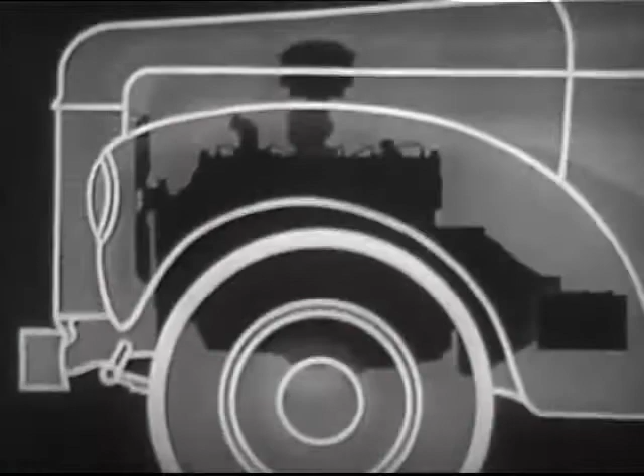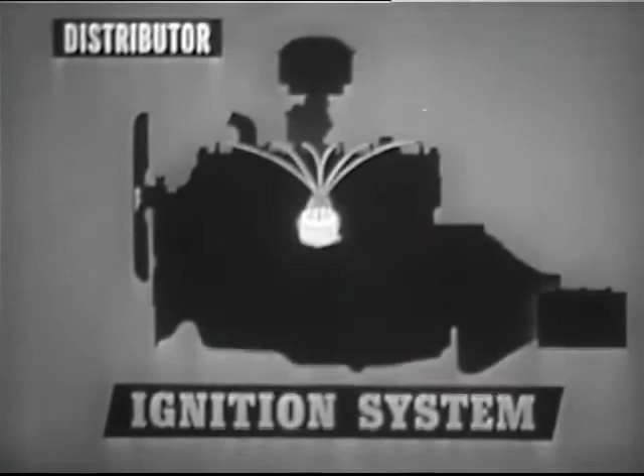Regular preventive inspection of the electrical system will help ensure its efficient and continuous operation. The source of electrical energy, the battery, must be maintained in proper condition to operate the starting motor, as well as the lighting system and electrical accessories, and the ignition system. Included in the ignition system are the coil, the distributor,

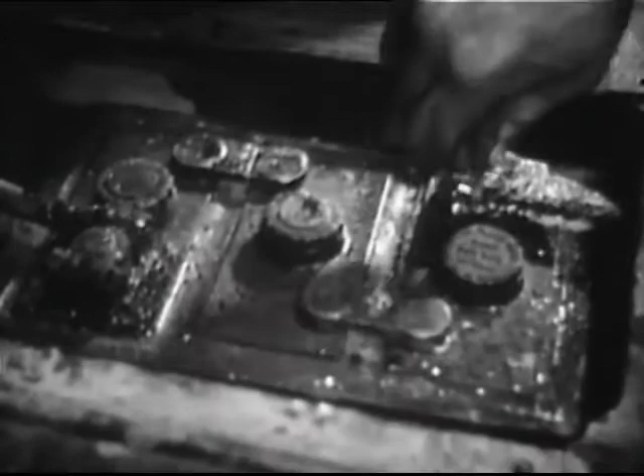and spark plugs. The generator, with its output controlled by a voltage regulator, must keep the battery charged. Since the entire system depends on the battery, begin by checking each cell with a high-resistance sensitive voltmeter. Fully charged cells should register approximately 2.2 volts.

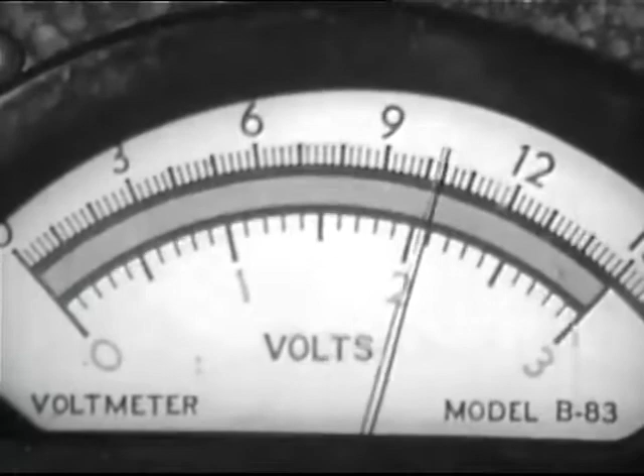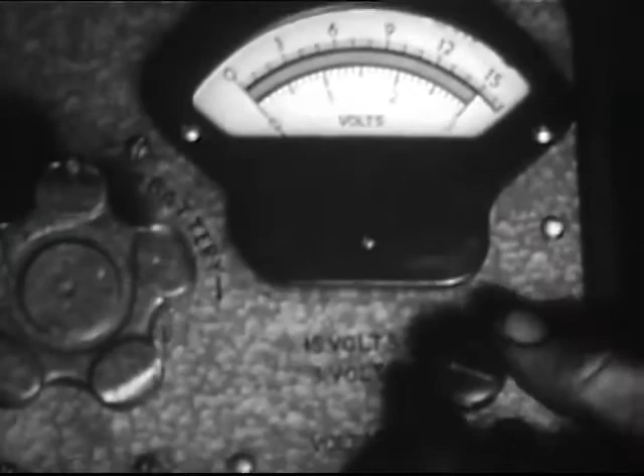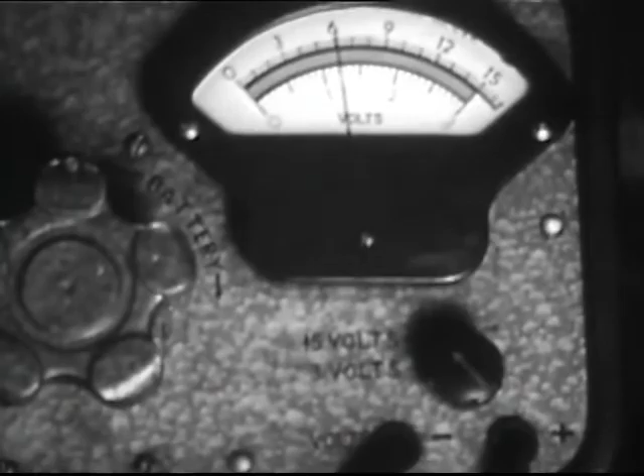Cells should not vary by more than 0.15 of a volt. Check the overall battery voltage. A 3-cell battery, fully charged, should test approximately 6.5 volts. Record the voltage readings on the inspection report.

Next, test the specific gravity of the electrolyte in each cell. Use a hydrometer equipped with thermometer and temperature correction scale. Fully charged cells should show a specific gravity of 1250 to 1280. Make allowance for battery temperature using the hydrometer correction scale. If the reading is low, 1220 for example, the cell is being undercharged about 50%. Record the hydrometer readings on the report.

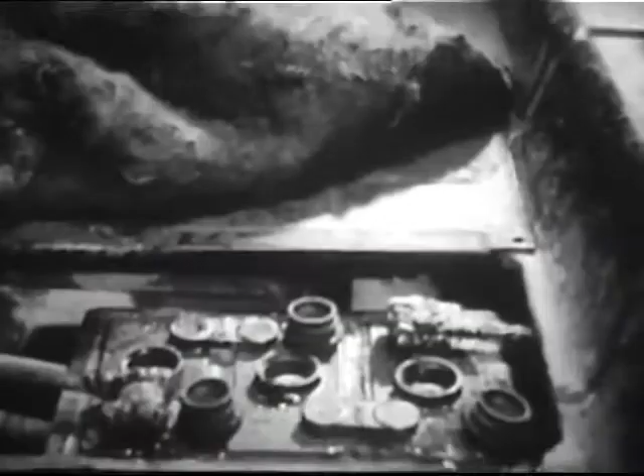Check the liquid level of each cell and add distilled water if necessary. To avoid overfilling, use a self-leveling syringe. Rest the tip on top of the plates and force the water in. Any excess is automatically drawn back into the syringe.

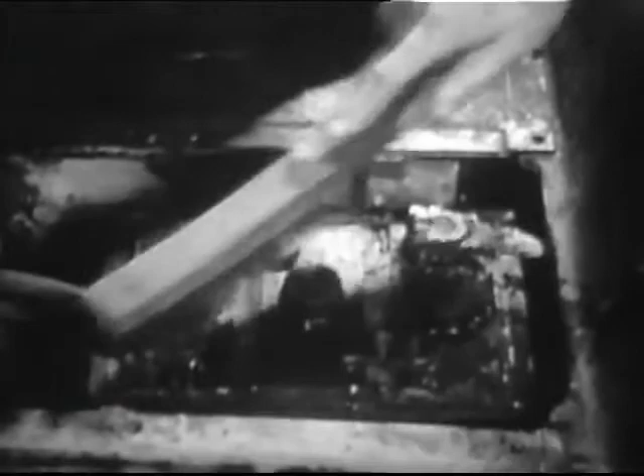Check cables and terminals for tightness. Remove corrosion with a stiff brush. Wash the battery with a weak solution of soda and apply anti-corrosion compound to the terminals.

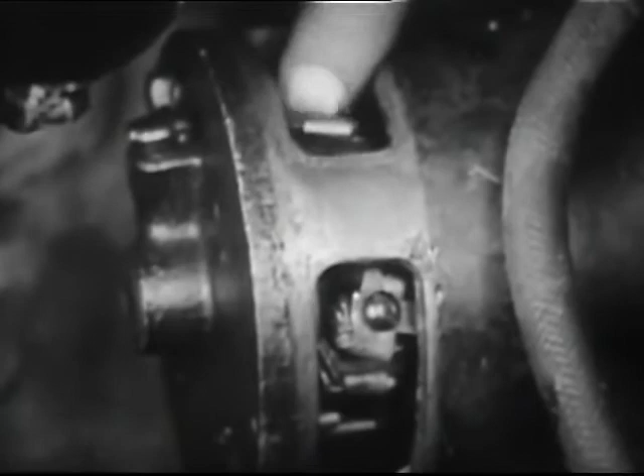To inspect the starting motor, first remove the cover band. Check the length of the brushes. Those worn to less than half their original length should be replaced.

Examine the commutator for high mica, flat spots, or pits. When using the screwdriver, be extremely careful to insert the blade only at the metal risers. Do not touch the commutator or the wiring.

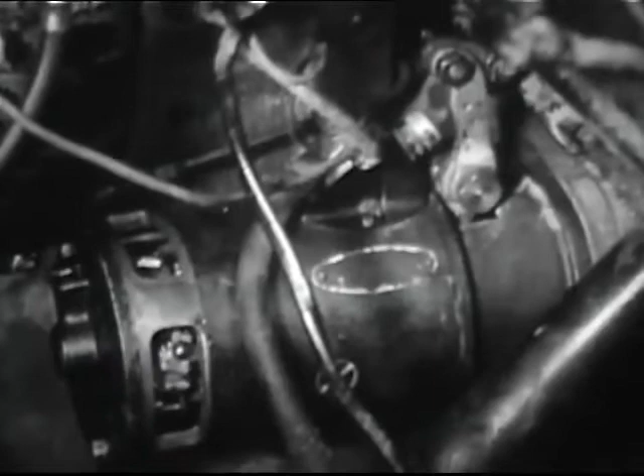If the commutator is dirty, switch on the starter and clean it with a piece of double-aught sandpaper wrapped around a stick. Never use emery cloth.

Check bushings of the starter housing for radial play. These show no appreciable play.

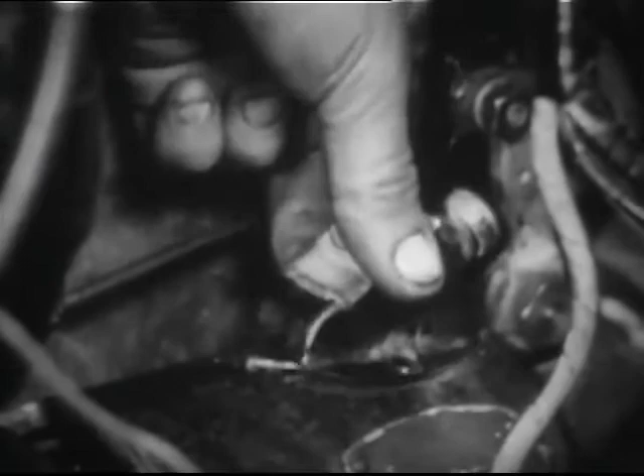Before testing the starting switch, disconnect the ground strap from the battery to prevent short circuit. Remove the switch and carefully inspect the terminals. Switches with damaged terminals should be replaced. See that all connections are tight.

Note the condition of the starting motor and switch on the report form.

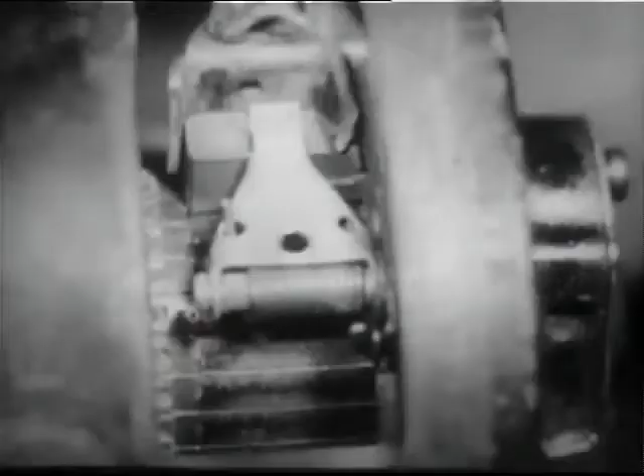Inspection of the generator is generally similar to that of the starting motor. Check the brushes. This one, less than half its original length, should be replaced. To replace brushes, the generator should be removed and work done at the bench. To properly seat new brushes, hold a seating stone against the turning commutator. Particles of stone are spread beneath the brushes, seating them very quickly.

Inspect the commutator for flat spots. If it has thrown solder, the armature is overheating and must be repaired or replaced. Otherwise, clean the commutator with double-aught sandpaper. Never use emery cloth. Springs with improper tension cause excess wear and should be replaced.

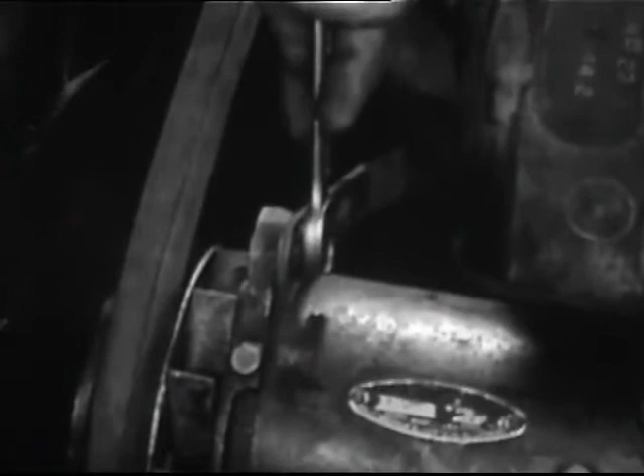Now, unhook the fan belt from the generator pulley and check the armature shaft for play or roughness. As a further test, run the engine and check for unusual vibration which might indicate roughness in the armature shaft bearings.

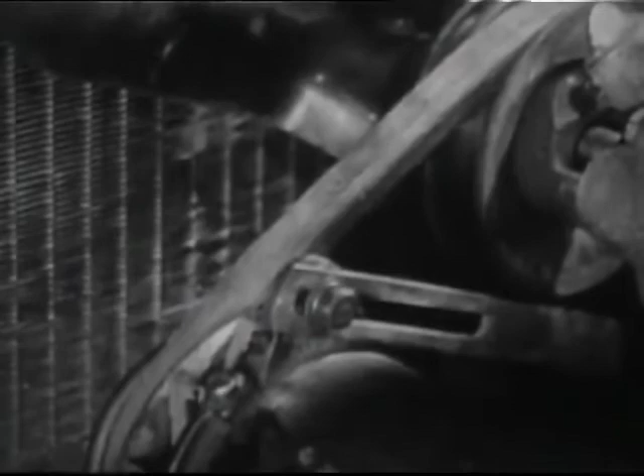Check the fan belt for wear and for proper tension. About 1/2 inch of deflection is correct. Be sure mounting bolts are tight. Check tightness of the terminals.

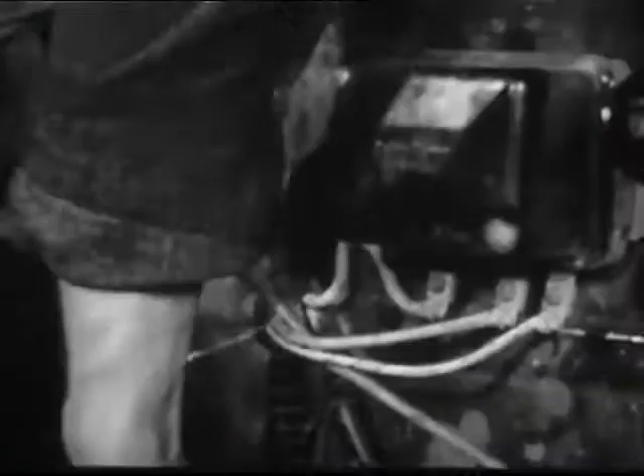Now make a quick check of low-tension wiring around the engine, particularly between generator and voltage regulator. Look carefully for worn insulation, loose or broken wires, and loose connections. Check the spots where wires may chafe against metal parts.

Check the lighting circuit. With the headlight shining on a wall or panel, operate the floorboard control switch to see that both lower and upper beams are responding correctly. While lights are on, check the ammeter. Tap the glass lightly if the indicator is sluggish.

To check adjustment of sealed beam headlights, turn on the high beam. The center of the zone of highest intensity should fall on intersecting lines fixed according to manufacturer's specifications. No extra adjustment is needed for low or traffic beam.

With the light switch off, check action of the stoplights. Each stoplight should cause a discharge of about 1 ampere. Turn on the ignition switch and make sure the gas gauge is working.

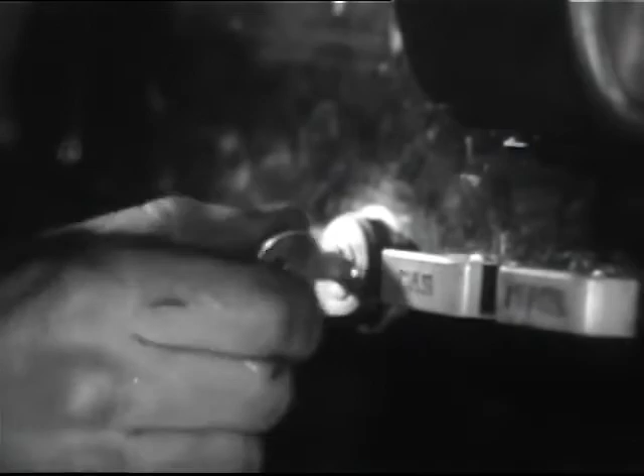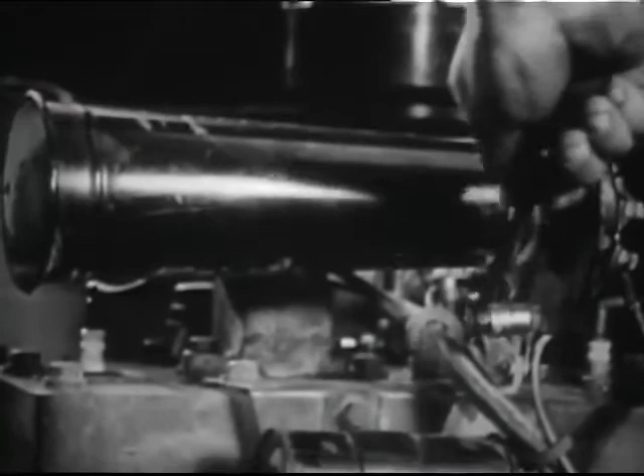To check the temperature gauge, warm up the engine for about 10 minutes. The indicator should show normal operating temperature. Be sure the horn operates properly and that mountings are tight. Report the checks made for generator, wiring, and electrical instruments.

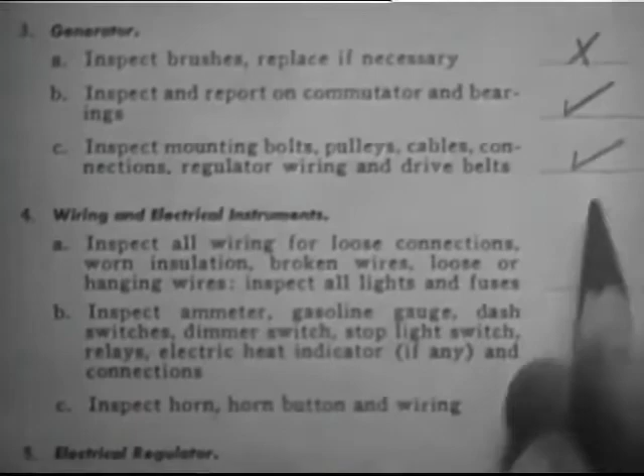You are now ready to conduct a series of tests on the voltage regulator. To test the cutout, disconnect the battery lead wire, and since it carries live current, wrap the end with tape.

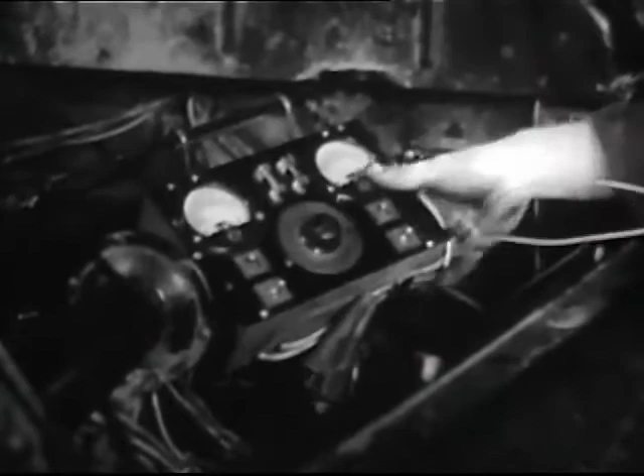Hook up a voltmeter between the regulator terminal and hold-down screw. At the same time, connect a tachometer to the engine. Run the engine at idle speed. If the generator cutout is open, as it should be, the voltmeter will indicate zero.

Now increase the engine speed until the reading is positive. This indicates the cutout has closed. Record this reading, and also record the speed at which the cutout first closed.

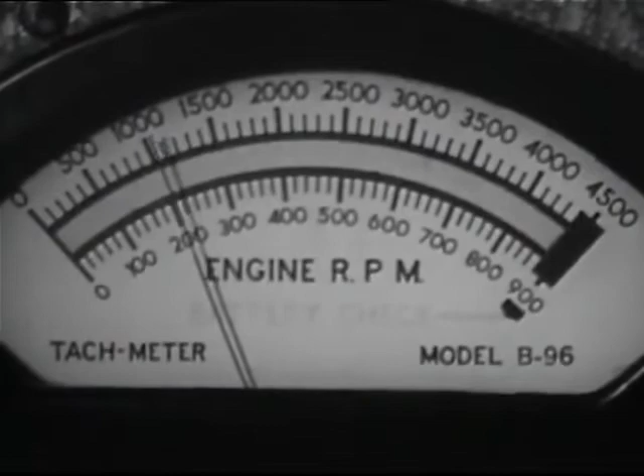Now to test the voltage regulator, increase the speed to 1,000 RPM and note the voltage. Compare this with the manufacturer's specification.

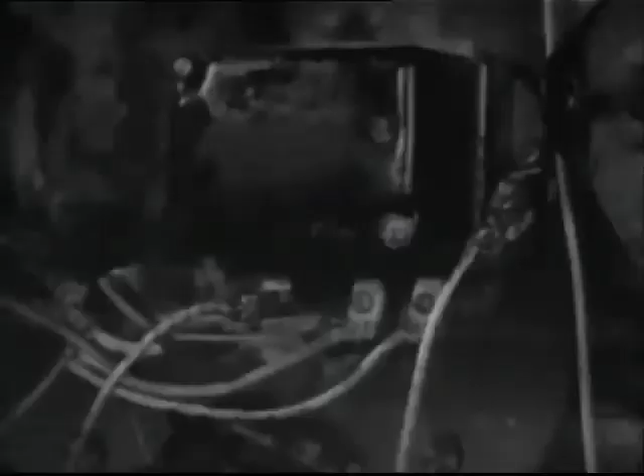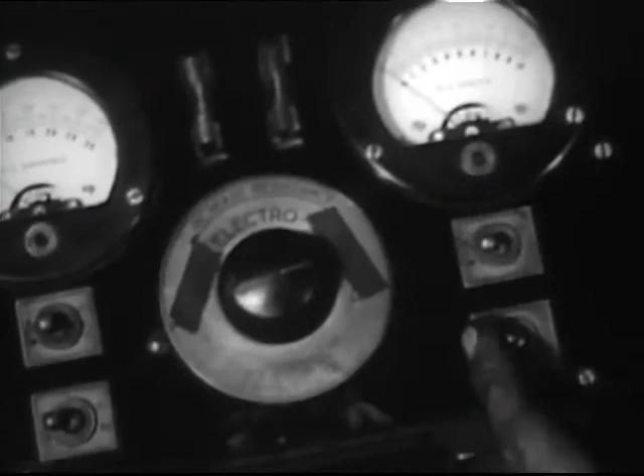To test the current regulator, hook up an ammeter to the regulator. The battery is still disconnected. Add resistance to simulate a partially discharged battery. Run the engine at 1,000 RPM and observe the charging rate.

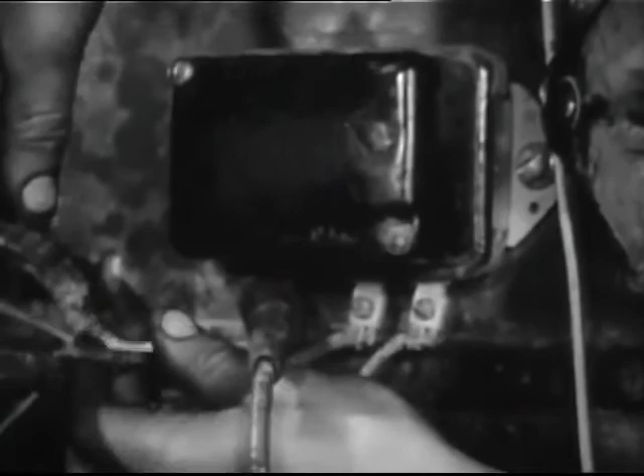Now eliminate the resistance and connect the ammeter lead to the battery wire. Again, run the engine at 1,000 RPM and observe the charging rate. Compare this with the dashboard ammeter. Both should register approximately the same.

To check the general condition of the wiring, battery, and starter, restore the battery lead and connect a voltmeter across the battery. Take a reading with both the starter and ignition off.

Now connect the voltmeter across the starter post and starter base, and with the starter off, observe the voltage. Next, run the starter half a minute with the ignition off, and again observe the reading.

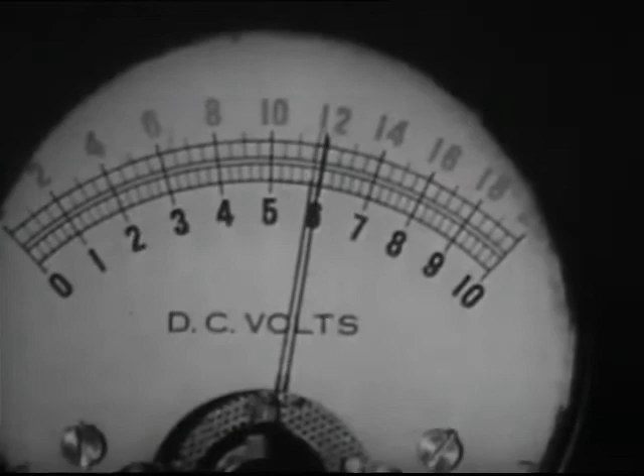Record all readings and compare with the manufacturer's specifications. Excessive voltage drop may indicate poor battery condition, defective cables, or connections.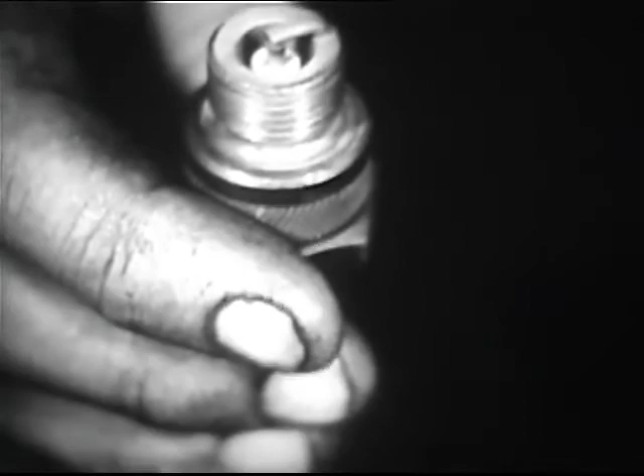Begin your inspection with the spark plugs. Be careful not to break the porcelain insulators. For efficient operation, plugs must be free of carbon and oxide deposits.

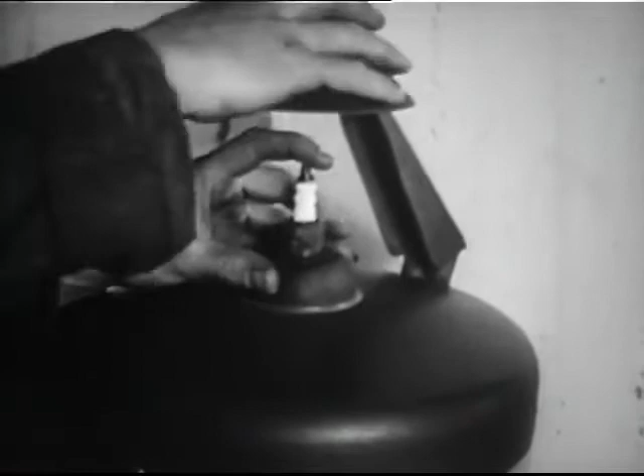Clean dirty plugs with a blast-type cleaning machine. If the plug is properly cleaned, the lower end of the insulator will appear white.

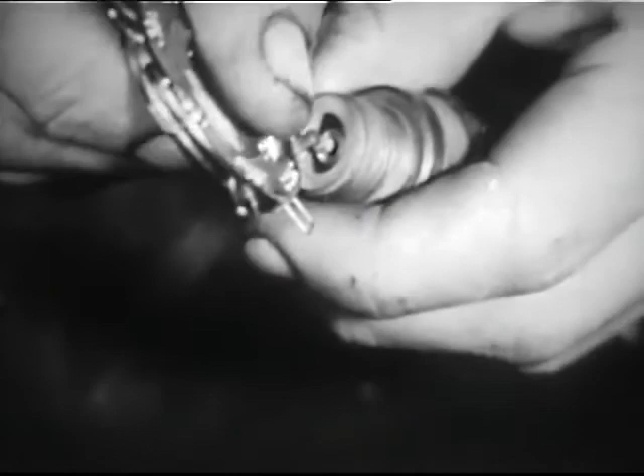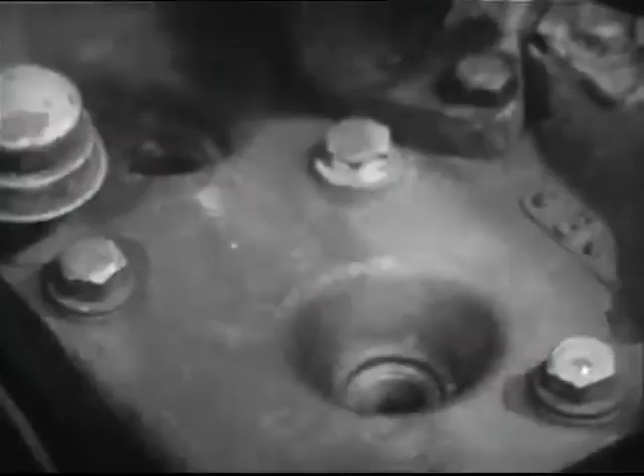Measure electrode gaps with a round feeler gauge. Make adjustments by bending the outer electrode, never the center one. In replacing, provide each plug with a new gasket.

Inspect high-tension cables for corroded terminals and cracked insulation. Check for corrosion at the distributor cap sockets.

This cable shows evidence of corrosion. Use a stiff brush to clean the corroded sockets. Replace the corroded cables.

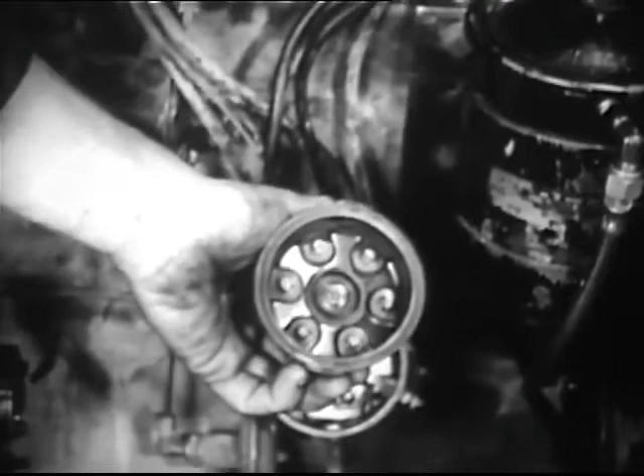Inspect the distributor cap for cracks. A magnifying glass is often helpful. Minute cracks, often caused by moisture, may result in high-tension leakage.

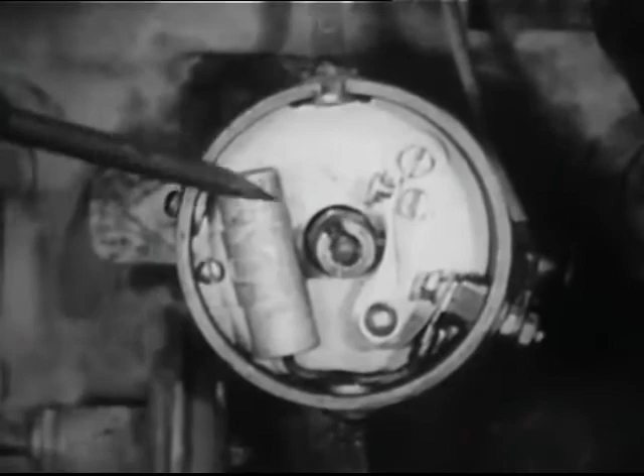Check the rotor to see that it fits snugly and is not worn. To check the automatic advance mechanism, turn the breaker cam in its normal direction. It should move freely and return when released.

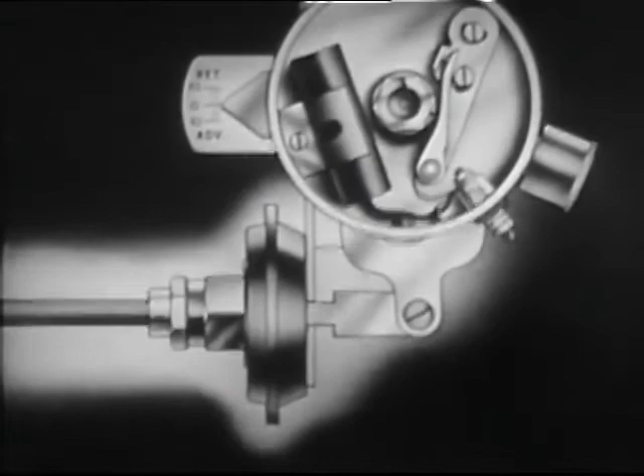Check the freedom of action of the vacuum advance mechanism. This mechanism, known as the vacuum unit, works off the vacuum line. Its principal parts are a diaphragm and spring. When the unit is advanced by hand, it will return easily if the spring is in good condition.

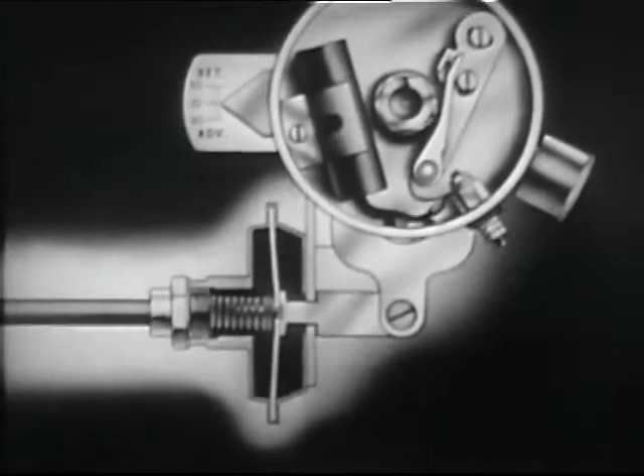Place a small dab of Vaseline on the cam. Use care—too much will damage the contact points. Apply a drop of light engine oil to the breaker point arm post and the rotor wick.

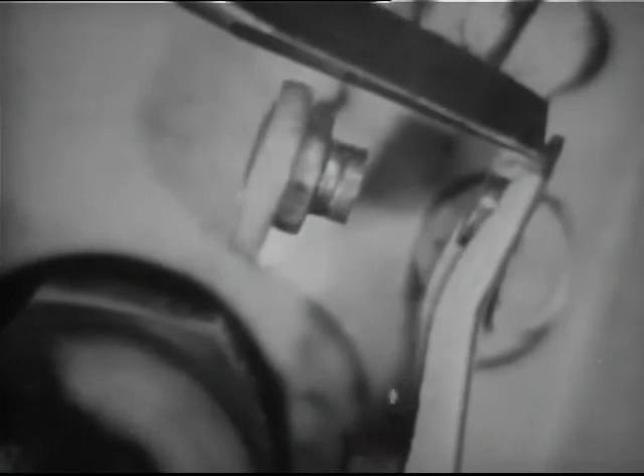Inspect the breaker points. These are in good condition. Burned, badly worn points should be replaced.

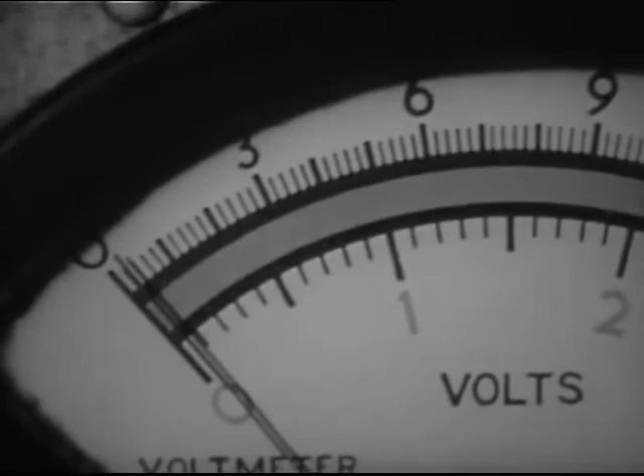To test the breaker point contact resistance, connect a voltmeter to the distributor. Turn the engine until the points are closed. Turn on the ignition and read the voltage. Any noticeable reading indicates high point resistance. In this case, none is indicated.

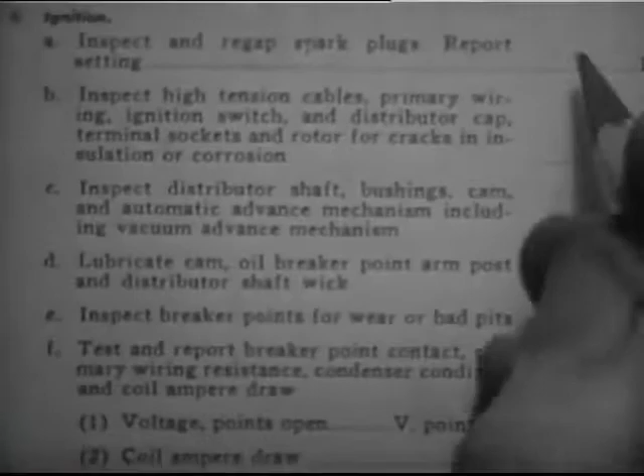To check the ampere draw of the coil, disconnect the primary coil lead at the distributor. Connect an ammeter between the coil and ground. Turn on the ignition and observe the meter. The coil should draw about 4 amperes. Enter pertinent data in the report.

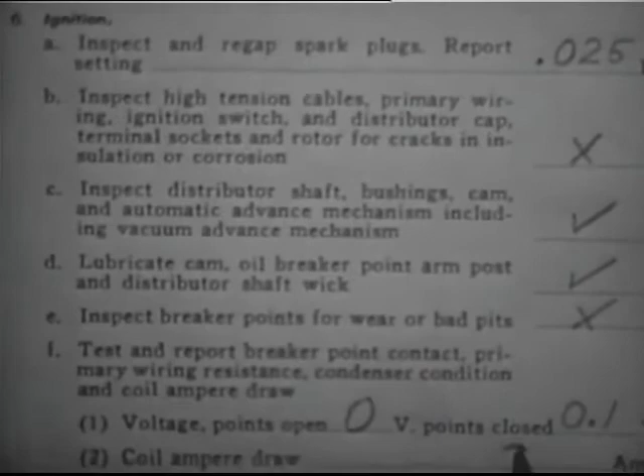It's advisable to remove the distributor occasionally and check for end play in the bushings. One approved method of setting breaker point openings is with the cam dwell meter or synchroscope. The meter indicates in degrees the cam angle at which the points are closed.

Adjust the points until the reading corresponds with manufacturer's specifications.

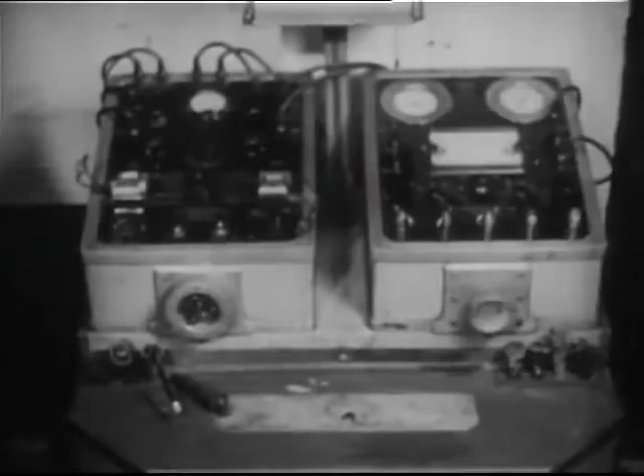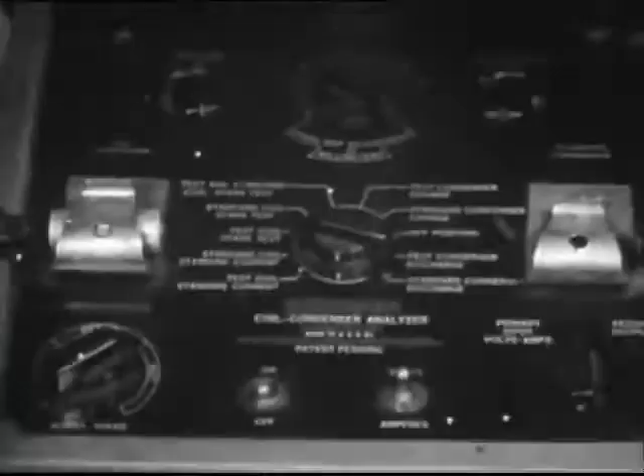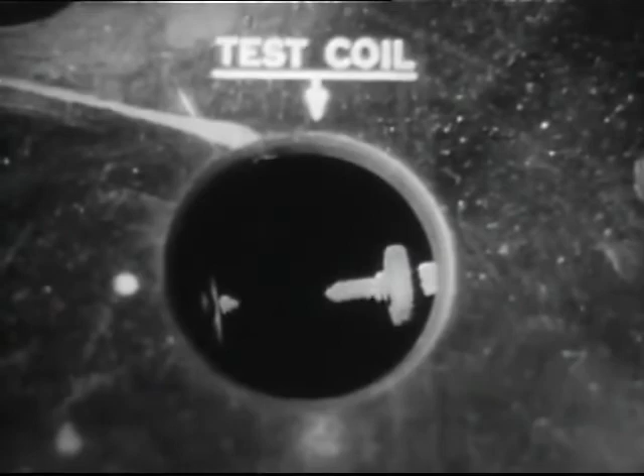Condition and capacity of the ignition coil may be tested with an adjustable gap meter. The coil should always be tested at normal operating temperature. A spark of the correct length indicates that the coil is in good condition.

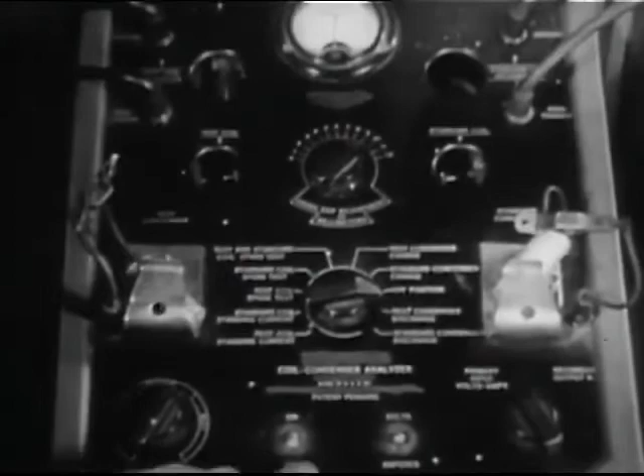A test meter is often used to check the condenser. In this case, the intermittent flash of neon reveals a leaky condenser.

Make your reports complete and comprehensive. Remember that careful maintenance of the electrical system is necessary to the efficiency of any vehicle.